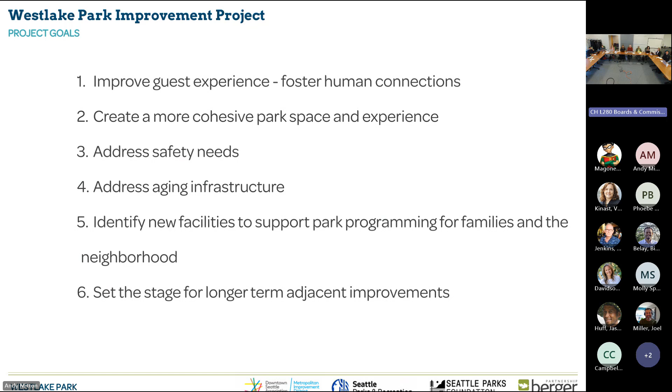So it's been a focus of ours to make sure that what we're doing is compatible with those future developments. Knowing that those are long-term, as Andrew was mentioning, this is really setting the stage to address some things that are failing, and there is an immediate need to get something done, especially with electrical.

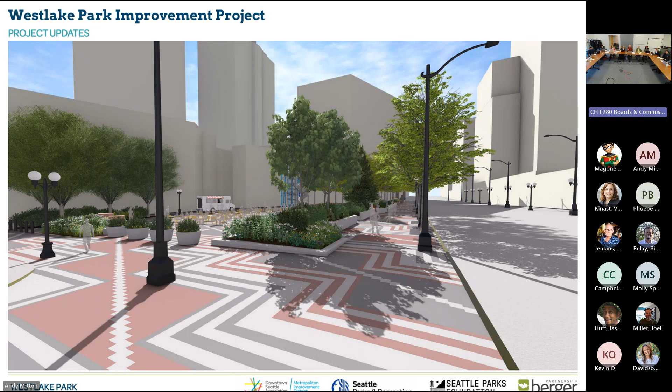One of the opportunities for some of the salvaged carved granite is along this wall, where we're getting a bit of a berm for the landscaping. You can also see along 4th Avenue there's a nice definition of edge, and it's very porous too, which will really help with making it feel comfortable and inviting in the park, and actually ends up being a unifying element through the site.

This is a view looking south into the park. You can see the granite elements here in this planting. One of the things the planting here does is provide a nice demarcation for where the alley is that we need to keep open, the alley egress.

We've provided a larger planting area here under the Zelkovas to help with their success and longevity, and it actually helps frame the park a bit more, giving it more of a park-like setting. You can see off in the distance an opportunity for an evergreen tree, which could be used as a holiday tree.

This is from near the playground, which is more or less where the temporary playground is located today—about the same size as what's there, slightly larger, allowing a little more flexibility and use for play elements. We feel it is right sized for the park.

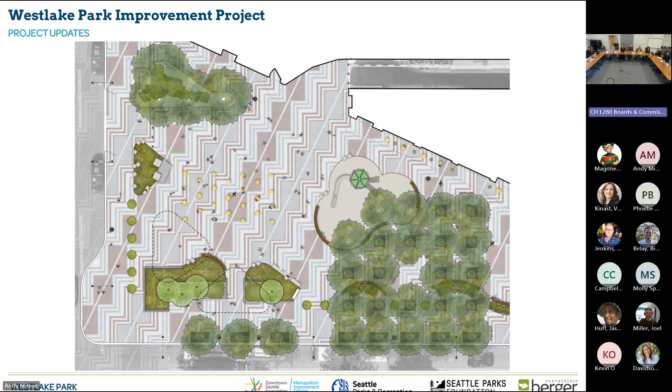I have a quick question. Is there an opportunity to ask project teams questions, just briefly as part of it? Yeah, just briefly. Great, I'll hold it for when it's based on that. What we've been trying to do when we finish deliberation is circle back with the project team - did we raise an unanswered question, did you have any questions about what happened or anything like that?

So I do actually have one quick question. Could you just, with your cursor, outline where the current stage is? Because now we see... It's roughly right in here. Kind of hard to see. And those dashed triangles were the old - those are the proposed new park shelters that are very conceptual still and are not ready for, and are not funded. Yeah, correct, okay, I understand that.

Is the play area in phase one? It all depends on our cost estimates from our general contractor and whether or not we can afford to do that. Is that the first thing that's sort of on the edge? Priority-wise, the priorities are to address the infrastructure and lighting and paving restoration. And we will need to look at what the priorities are. I think the play area is one, but the landscaping and site furnishings are up there as well. So really budget dependent.

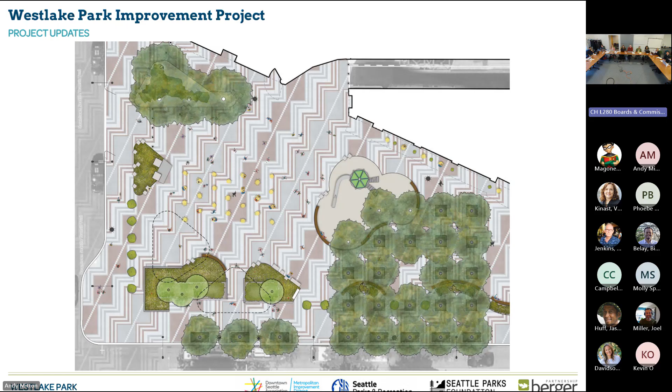And the planter, so that's a planter behind it? It's a flush in-ground planting area. Okay, so the person as they're standing would be visible 360? Yeah, you can see it, except for here, these bushes—these are the salvaged pieces. We don't have a view that really shows it well, but you can sort of see it in the background.

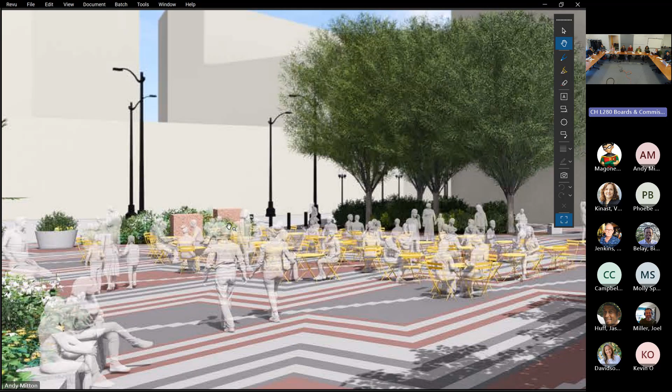What about a person sitting in a wheelchair, would they be visible 360 from the other side of the plantings? Maybe not, it depends on what the plantings are. I'd ask how important that might be, because that's not really how it's functioning now, because the existing stage has been altered—you can't sit or climb up on the other side because a wall was put in and plantings added to prevent people from interacting on that side. So it currently is a one-sided stage that faces the park. I see, because it used to face towards Pike.

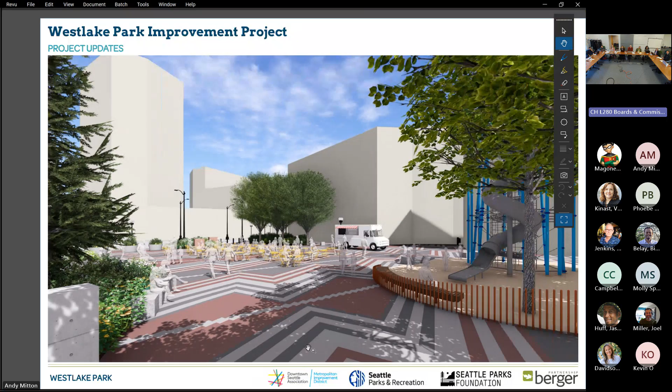I have one other question about the stage. Did you look into keeping the current location but modifying it? Was there exploration of current elements of the park and repurposing them?

We have explored that—let me get back to the site plan. One of the things we did in shifting it is, right now when DSA sets a stage up, they have to set up a temporary stage because the current one isn't large enough to accommodate most of what they do. It's also hard to get performers up there, especially if disabled, and it takes up space usable for tables, chairs, and seating. By offsetting it, it allows them to set up a stage either here or down here, getting more people into the open space. That's why we offset it, to allow more flexibility and use in the area.

Also off of the footprint of the tunnel. In terms of responsiveness to Sound Transit, they don't want us putting elements on the tunnel. There's some right now that we're going to have to move off. But that's the other piece, we're trying to keep those elements within the park footprint.

Sorry, Beth, do you need to move things from this plan to accommodate that, or has this already moved things? The current stage is over the tunnel. Correct. So you're being very careful to dismantle that and not put anything large above it. But it's Sound Transit saying we can't have that above the tunnel. So if it were to remain, that's fine because it's existing. We haven't had that conversation yet.

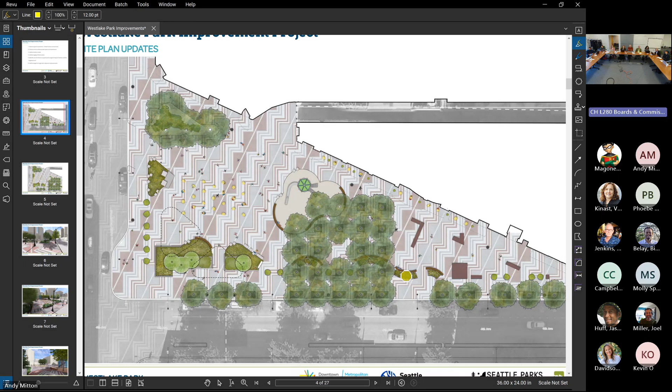There are raised planters that sit on the paving that serpentine and weave through the site, including benches on the backside that are permanent. You can see them through there. So those are above ground, about 30 inches high, and they're also performing double duty, which is we've been required to provide a defensible edge that is crash protected and rated. So that's the other reason why they are there.

There will likely be some feedback that the Parks Department internal design team gave about providing a bit more buffer along that 4th Avenue edge, because a lot of the time the traffic there feels very fast—there are buses and cars moving quickly. So that has a kind of benefit of giving the park more enclosure as an urban space.

On the north side of the park along Pine, has there been any further coordination with the Pike Pine Streetscape and Bicycle Improvements Project on that edge? Has there been any thinking about the behavior of the pavers there, or about the planters on that side? We'll be meeting with SDOT coming up to talk more through that, and it will need to be coordinated further as we learn whether the planters they're developing are crash rated or not. I don't think they are, so I think we're still going to be required to do what we need to do along the park edge. I think there will end up being a double row of planters along here, and we'll coordinate with SDOT as needed.

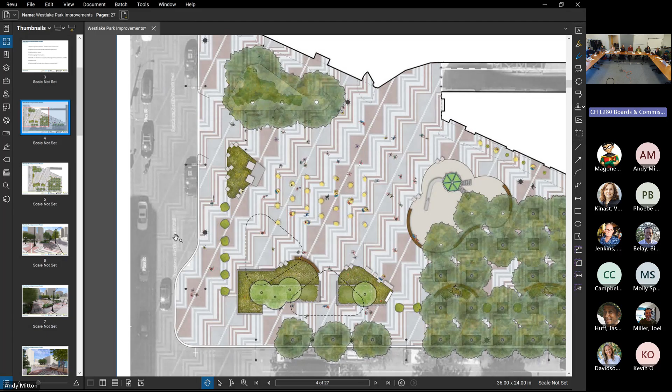I have a question about the playground area—do you know how much it's being utilized right now? Is it popular or not? I know you've done engagement with the community. Anecdotally, from being on site, it tends to get a lot more use in the summer. Not surprising—weather's nicer, there are more tourists in town, lots of families visiting. I have seen it get used in the winter too. I think part of the reason it doesn't get used much is because there's not a lot there, and usually what we've heard is kids will play on it for about 5 minutes, get bored, and move on.

I think I mentioned this before, but the downtown activation plan, which surveyed 700 or 800 people, called for a lot of desire for free, fun family activity downtown. Part of our responsiveness is from that survey. We also did our own survey and had interest in a play area. I know DSA does quarterly surveys in terms of people using it, so that supports the idea for it expanding, but again, it's much smaller than what we had originally shown.

I want to make sure we have plenty of time for deliberation. I think we do, I think we've got plenty of time. Why don't we go until 9:45 with questions, since there's obviously a lot of additional questions, and then pivot to deliberation and action?

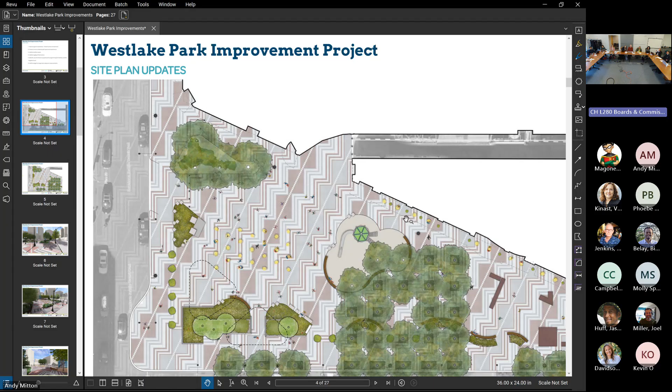Yeah, there's an additional design language added that doesn't feel in keeping. Well, not even in keeping, it just doesn't seem consistent across the park. Are you speaking specifically to the curved? Yeah, landscape seating - in some of those renders, everything's very rectilinear. The trees are laid out in a grid pattern, the streets are 90s, there's very hard lines everywhere. I think what they're trying to do is soften it - I don't want to speak for you guys, but you're trying to soften the lines.

But it seems like sometimes you soften it, sometimes you don't. Sometimes it just doesn't quite say that it's all been thought together to me. Even in this render, the pots just sort of seem like they're blocking the patio, which they are there to do, but they don't seem to be of the same language. I don't know, they just sort of happen to be pots there, and I'm trying to figure out how to make it one thing.

You guys referenced Bryant Park earlier, last time around - that has one language consistent throughout the park, right? I think our current park has one language consistent throughout the park too. Yeah, I kind of struggle with the same question - there's this very basket weave, very predominant pattern, especially when you see it in plan. I'm not sure you really experience it that way in person though. So my initial reaction seeing the plan view is like, why do we have all these curves? But I think it's more about how you experience it in real life.

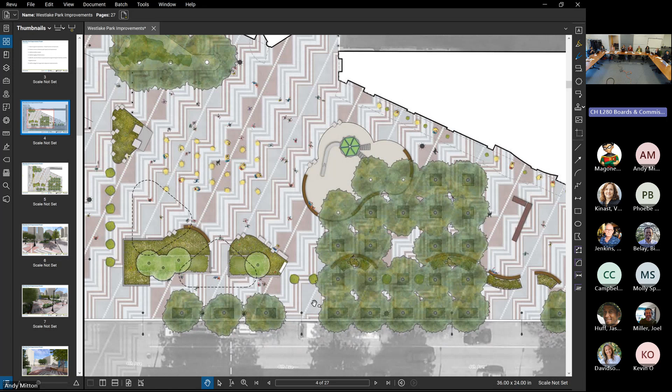I totally agree. And I think the one I'm struggling with most is the northernmost one, because the western two planters engage the pattern and then loosen up on the interior. There seems to be one language happening there that I think spread across all of them could work. I think the serpentine could work—grabbing an edge of the pattern and then loosening up on the interior feels like it could work.

But then the all-curves, all-at-an-angle approach of the northernmost and west feels like the anomaly to me, in that it's just loosely plopped onto the paving instead of engaging it and then intentionally loosening. If you were to keep the arch and have this more rectilinear component, I'd be curious—is there vegetation that could engage that rectilinear component to do what's being achieved here?

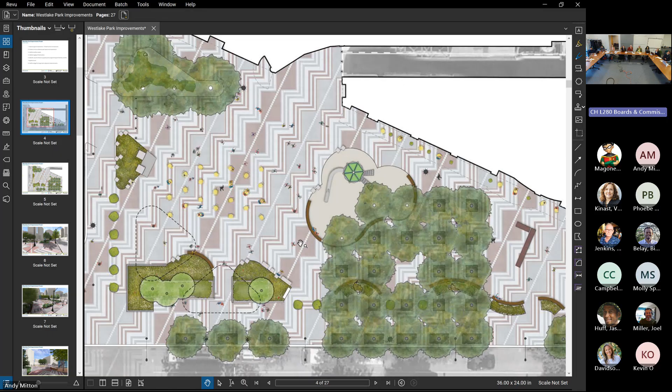To your point, the plantings become the softening curvilinear component. With the loss of that volume—the rectilinear volume of that archway—to me it's like all the energy just drains out of this space. It loses a lot of its physical presence in what is a downtown space with malls and these large rectilinear forms, which we acknowledge has an 80% vacancy rate right now. But I really think you're losing a huge component of the identity of this space if you get rid of that arch volume.

Particularly with this perspective—could it become a threshold into this location compared to a barrier, as you're describing it right now? Picking up again on the geometries, the Coast Salish pattern is the field, and nothing in the existing park actually aligns to it. It's all object placement, and the art is the very explicit form of that. The bosque trees hold that center, and I think the additive piece and the arch actually are that as well—it's an object in the field, it's a folly. Westlake Park is designed as a series of follies.

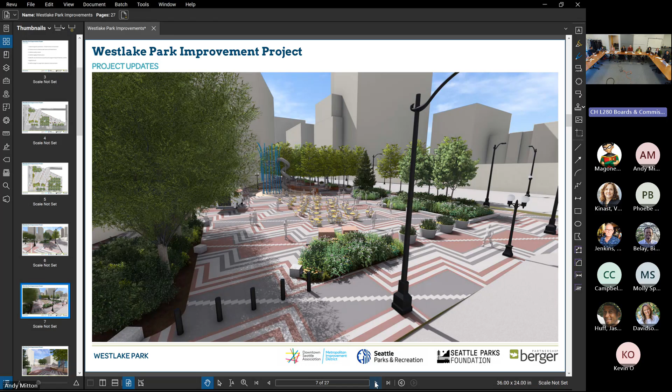It's kind of high level. Darklight is looking at, in the north—I'll go back to the plan. In this north area, there would be a series of 6 poles flanking either side of this, where we'd be able to get lights that directionally cast down on the pavement.

Jill Cody is on the design team from Darklight. She's not looking to uniformly light the space like a prison yard. We are looking to meet the standards for light levels, but we want to do it in a way that makes the space feel comfortable and welcoming.

I should preface this a little bit—we have adequate lighting along Pine Street and 4th. It's almost overlit right now because of the spacing. So a lot of what we're trying to do is brighten the other areas to level out the lighting to a certain standard that Jill would have to go into more.

The tree grove, probably the Zelkovas up here to the northeast, is the toughest space to try to get lighting in because we've been asked not to attach anything to the trees. That's been a huge problem to date because everything is temporary and zip tied. So what they're looking at is a series of offset poles that somehow brings catenary light elements through the trees to give a soft glow and a warm, inviting feel to the grove.

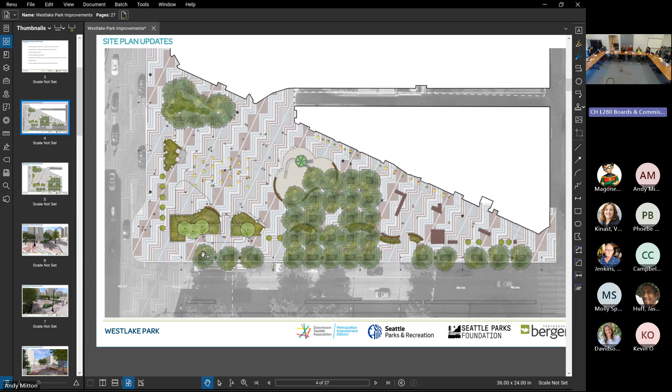I think I get that, and it absolutely makes sense. But it does bring up the question—if this is a parks improvement plan with a tight deadline, are we retaining the public input that could not be completed within that timeline as any future visioning for Westlake occurs? So as anything happens on the south end of the site, how are we retaining the broader public input as we take care of the things that are fundable at this moment in time?

Isn't that why the perimeter and setting up continuity around the edges of the park, plus rewiring for electrical things, is more important, and the things in the middle are less important? It seems like we're going to define the boundaries now—we're going to build the boundaries now, put in upgraded electrical, and get rid of the old fountain.

And then we're going to focus on what's in the park once the community and the funds and all of that. That's sort of how I'm hearing this. I guess my question is, is there intention to do that? Are we focusing on this park improvements project now, and then are we retaining this as a long-term vision after?

Yeah, but we already know it's not funded for at least 6 years and it's got to live as this thing. So the tension is then what are the decisions being made right now that have long-term knock-on effects for the community's sense of identity and relationship to this place? Are those decisions being made right now to meet this construction deadline?

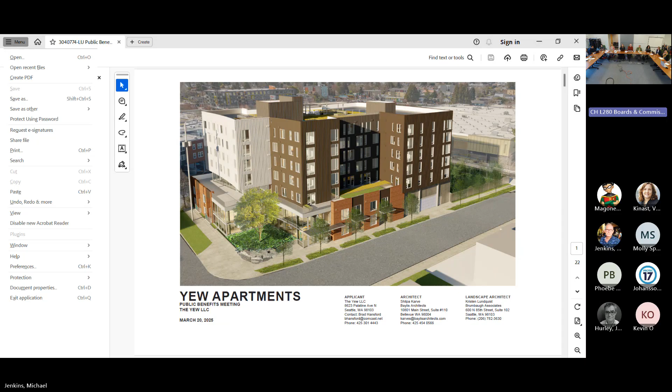Yes, I do, thank you for doing that. Sure, so let's start the presentation. As Michael mentioned, we are here to present the public benefits towards the alley vacation petition that was filed in November 2023. We had a meeting with the subcommittee last year, almost exactly a year ago in March. We are here on behalf of our client, the Yew LLC, representing Baylis Architects, Brumbaugh, and Molly from Van Ness Feldman.

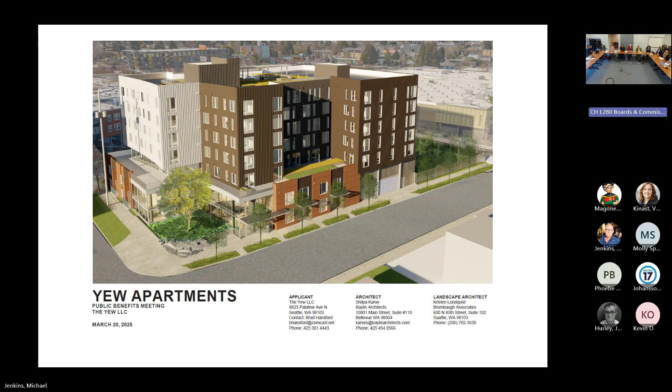The couple slides that we'll go through next are essentially just a quick run through of where we are currently. Next slide, please.

This is the project site, looking at it from the northeast corner, bird's eye view. What we see is 87th Street, which is the urban edge of Greenwood Village, urban village. On the west of the site is a conservation parcel that's about 11,000 square feet. There's another unique feature to the site, which is the yew tree, and the design of the building is pivotal to that tree. There's also an alley that's a remnant, it's dead-ended, with no functional use, no vehicular or pedestrian use currently, nor any utilities. Next slide, please.

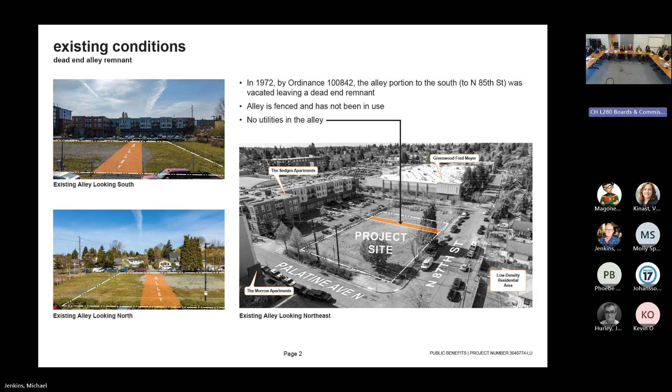As part of the application, we had two community engagement meetings. One was two years ago, mostly to introduce the development. The other, more recently in January this year, was to go over the design changes that resulted from the EDG, MUP, and SDC subcommittee review comments, as well as changes to the owner pro forma. We also took information from our previous community outreach meeting and folded that into the design. So the latest meeting was to introduce to the community what the changes were. Moving on to the next one.

Looking at the current state of affairs, that's how the building massing looks from the same vantage point, the northeast corner. The building density changed, and we've added more residential uses to the streets. Palatine already had a townhome connection; we've added a similar connection on 87th, which will unfold later. The purpose of the vacation is to fully utilize the design potential of the site and in turn be able to provide public benefits that are actually beneficial to the neighborhood.

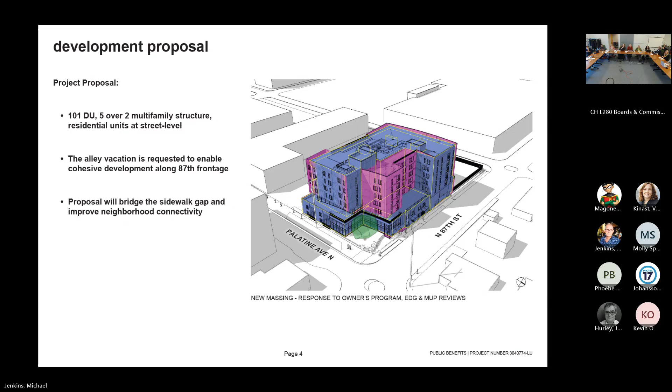This is a quick overview of the changes to the design at the ground level. This slide is important to us because this is an interface that, although within the project site, faces the public realm. Here we explain that we've made changes to the design such that most of the facades facing the pedestrian level are all residential.

Based on the last subcommittee review comments, the design team went back and zoomed out, looking at the larger scope of the site, and noticed there are two large public amenities: Sandel Park to the north and Greenwood Park to the east. We realized the pedestrian connection there is good linkage, except for this portion missing on the site next to 87th. We felt that was an important connection to complete the sidewalk and pedestrian linkage.

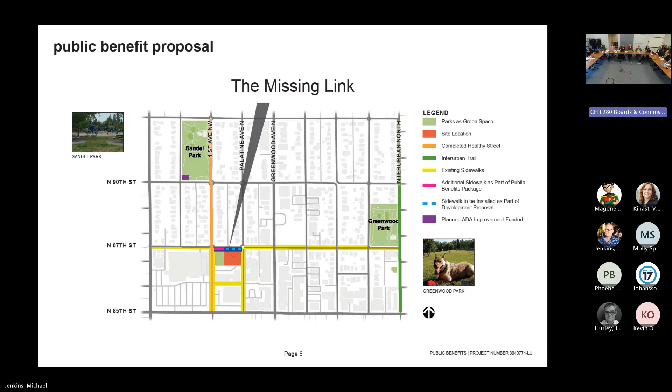Let's dive into each of these public benefits. What does the new extended sidewalk connection mean? On Palatine Avenue, we're providing 2 additional feet of sidewalk extension to promote walkability and more use of that space. As you turn the corner onto 87th, we're extending the sidewalk from the project site boundary all the way to 1st Avenue, including 6 feet of sidewalk and 6 feet of planter strip built to City of Seattle code. On 1st Avenue, we're widening the existing 6-foot sidewalk by 2 feet and proposing pervious pavers since that site is a stormwater drain, which works better given the current use there.

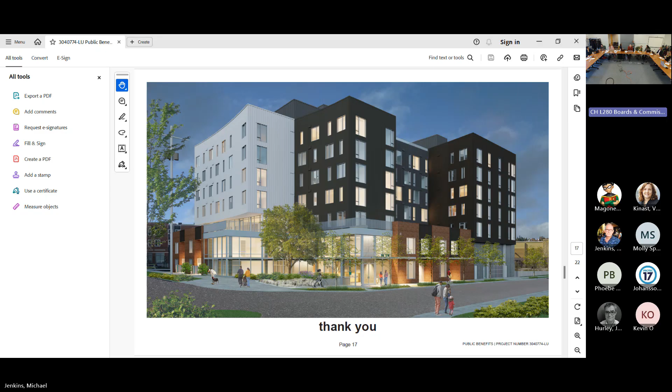Okay, well, thank you everyone. It's nice to be back here and it's nice to be back with this project too. I didn't realize it had been so long. Almost two years now.

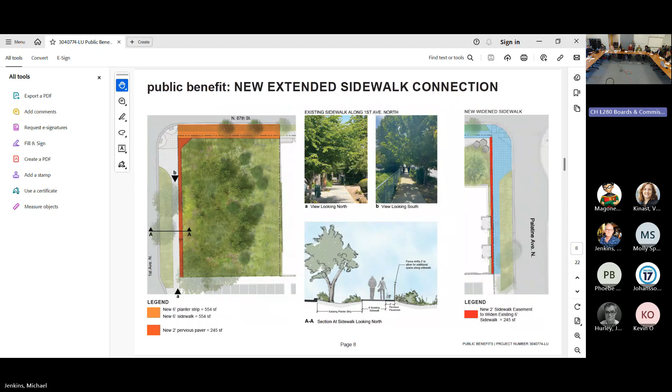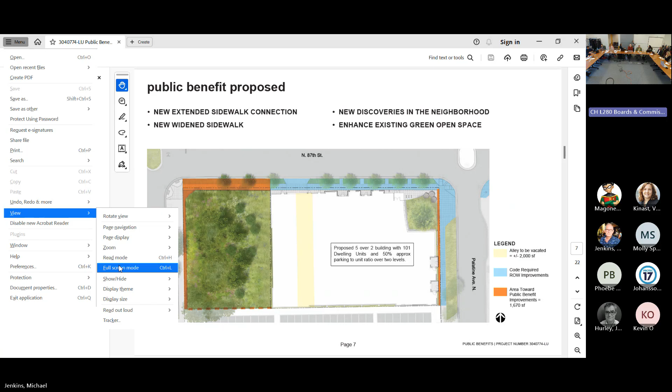Overall, I think the project has evolved in very positive ways. As you know, the developer stepped back and looked at the number of units and the makeup of units, which stepped us back. Kelsey's worked on the SIP from the very beginning, so she'll talk about some of the street edge stuff. But it feels very positive. I live one neighborhood over, so I'm very familiar with the area, and the project just fits right in. Greenwood is becoming really hip, and this will be a great addition.

As the project evolved within SDOT, we wanted to be clear on what our obligations are from design review, code, or standard practices, versus what would really rise to the level of being beyond code and a public benefit. So we wanted to make sure on that. I have some questions about the one gravel strip, and Kelsey's going to talk about the materials.

But I think we're at a pretty good spot in understanding the obligations of the project and what would be public benefit. The evolution of the use of the conservation site and the amenities associated with it, they just look cool. I can see people walking by to Fred Meyer or Taproot Theater, being really charmed and engaged by the art around the site and the enhancements. Those look impactful, maybe beyond what they are - as a package it's arresting when you walk by. I really like that. The streetscape looks good as well.

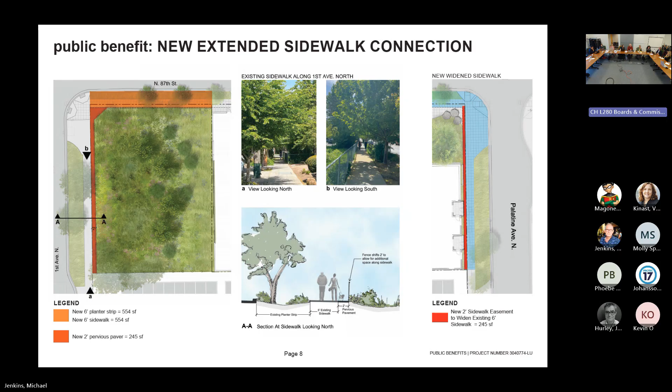At that, we will turn it over to Phoebe for questions round and then conversation. Do you want me to put up a particular slide? I can start here, and if you guys need - I'm driving the presentation. Right, I think that's fine. I thought we would just go around the room for the questions and then put forward the set of deliberation, which are pretty straightforward, I think, shortly. So we could start with Kate and just go around as needed.

Thanks for this presentation, it's really great to see its development - just to echo everybody else's comments. Very excited by the direction the conservation parcel has gone, because I remember when the project was first being presented, it wasn't being touched at all. So it's a huge development. I was curious to learn a bit more, if you have any sense of how the decorative panels will be designed, or where it's at right now.

We're just starting on the design of that, looking at laser cut, painted material that can be attached to a fence or integrated as part of that, so that it's easily cleaned and can be maintained nicely. So the imagery shows one option, but we're also looking at other materials.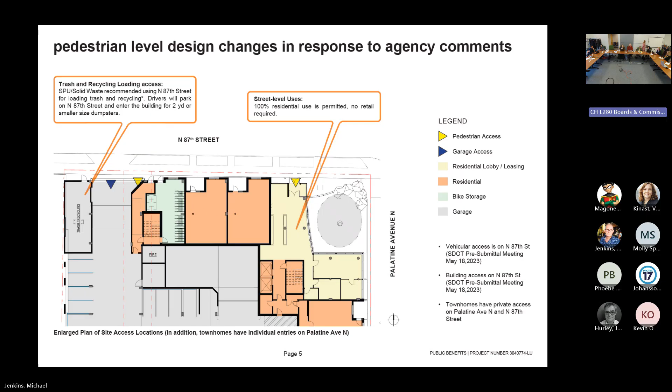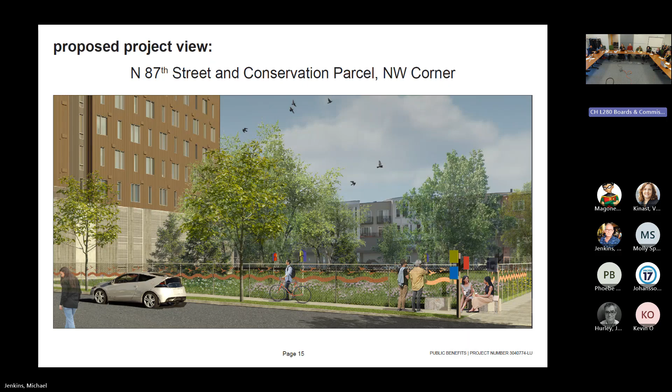And I'm assuming that's all worked out. Another question was about the aesthetic of the wall that faces the vacant land, since that will be a finish facing the neighborhood. Could you go to that render? Sorry, I think this was stuck on the first side, I was really stuck on the solid waste slide. Yeah, there's a rendered view, it's towards the end. Oh right, there you go. Okay thank you, go one backward.

To answer your question, what we have is board form concrete that alternates with regular concrete, and board form concrete in vertical panels, to mimic or draw from the concept we have going for the upper masses. The base has openings that alternate and will have metal mesh, which is to bring in natural light and ventilation into the parking.

There was a significant change in this facade between when you saw it last and today through the design review process, which really changed this whole facade. If you remember, it was somewhat flat and didn't necessarily have the same unit counts. Now the units are much more visible than in the previous iteration. The design concept is based on growth rings of a tree trunk, since the yew tree was pivotal to the design. Each tier is a ring in elevation, hence the curve at the west wall where the mass is reduced. We've reflected that in our colors and materiality, with vertical siding throughout.

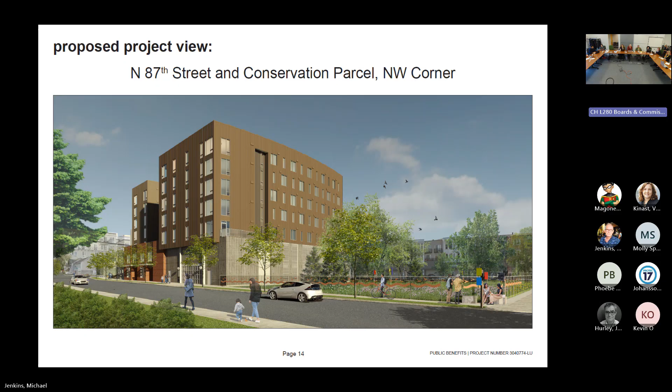I remember in the last presentation there was a lot of focus on the other corner. Is the seating plan you mentioned on the other site still there? It's by that tree at the corner, we have some boulders there. That area is still proposed, it's just not part of the public benefit, but it utilizes stone. The yew tree will have native plantings underneath, sloping down, using stone to create a more organic condition with seating, and those elements are repeated at the corner of 87th and First, in a smaller way.

My only question was whether the space where the yew tree is located is accessible to the public, because in a previous iteration it seemed fenced off. The sidewalk is pulled back there so there's more circulation space, but a sizable area is not physically accessible because we want to maintain the yew tree itself. It will be landscaped. That was my only question.

I have no questions, thank you.

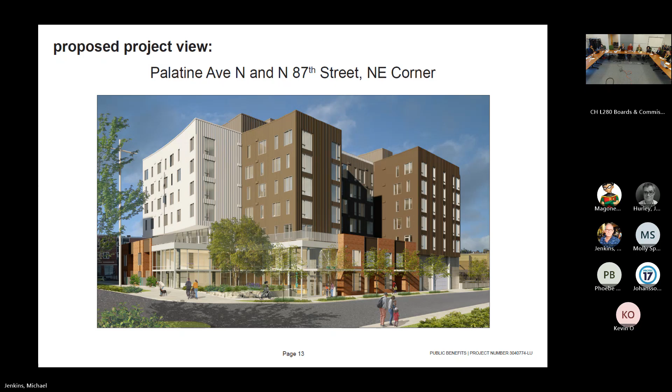I'm curious about the adjacent traffic circle, if you can share what you studied, what worked and what didn't work, related to the adjacent traffic circle right here.

So when we looked at this, in earlier proposals we tried to engage that corner, and we were trying to look broader. We pulled back in and looked at the site as a whole. At that point we took on conservation corner. When we revisited going back to the traffic circle, it became too much of a fight, so we didn't look at other options for that in conjunction with what we're proposing here.

On Plan West, that area is pervious paver gravel. The portion on Plan East is an extension of the sidewalk. Just want to clarify that.

A little more on the question about the fence - are you engaging artists for the work on the fence, or is the project team completing the fence design? The project team.

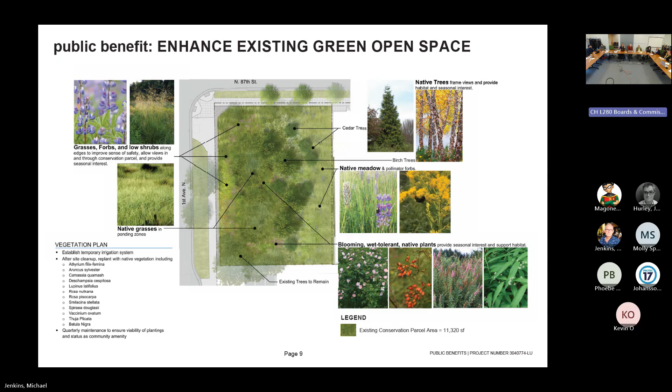Make sure they don't reintroduce - we captured that on the last slide. So the owner has allotted dedicated additional funds for additional maintenance over time. On which slide? 27 - these are additional slides we had. Oh, here, this? Yeah, we gave an outline, a summary. And that's like a 20-year time frame, perpetuity? TBD - it's going to have to be multiple years for sure, because those natives have to establish.

Are you guys doing anything with the building runoff feeding the park, or any sort of combination of the two? Given that it's a peat site, everything's just getting routed straight down to perf pipes below the building to rehydrate the peat.

That's a question that's not strictly our purview, but it relates to some of the policy objectives in all this. What is the parking provided in the building per unit? It's about 50%.

I mention it because with these projects and the increased density in the city, wider sidewalks seem like something that is not always there. So this is more a comment and question, but I think it's significant to add 2 feet.

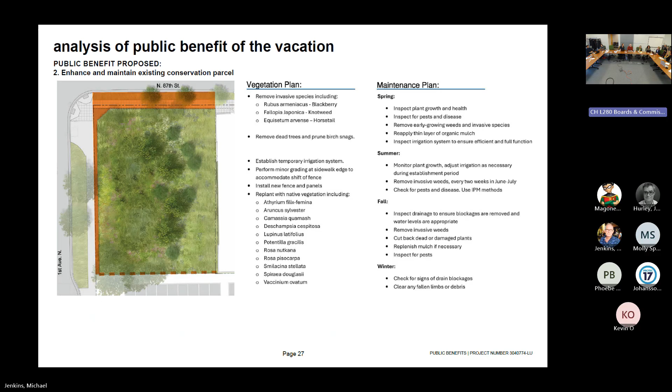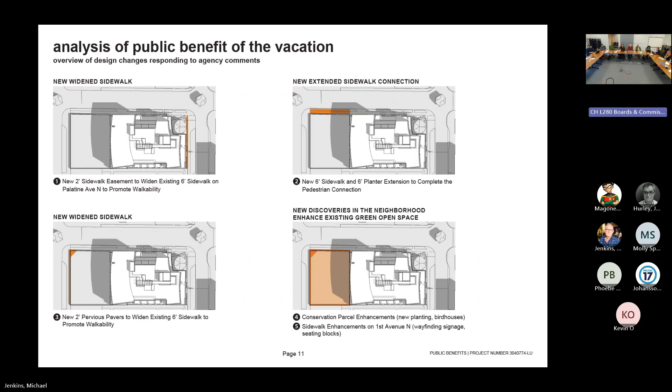Okay, are we ready to discuss? I just have 4 overall buckets, let's talk about them as a group. Don't need to go around the room, just clarifying that again. So the first one is overall improvements to meet public benefit, just commentary on that.

To reiterate, Michael's nicely put them on the screen: the extension of the sidewalk, widened sidewalk on First and Palatine, new discoveries in the neighborhood, and enhanced existing green space. So just overall commentary on that, and whether that meets public benefit.

Number 2, the overall design and building response to previous comments, or any additional values you want to put in there, especially how the building is relating to those public benefits proposed. Number 3, overall response to public engagement, and how that's manifesting in the design.

And number 4 is kind of a subset of the public benefit, looking at the overall plan for art, signage, birdhouse, fencing that Kate brought up a bit, just that overall piece of the package, because that's kind of additional past the scope of the project. Anything else? So 4 tiers.

No? Okay, let's go. So first, public benefit. How do we all see the proposed public benefit? Any additional comments, concerns? Phoebe, I'll weigh in.

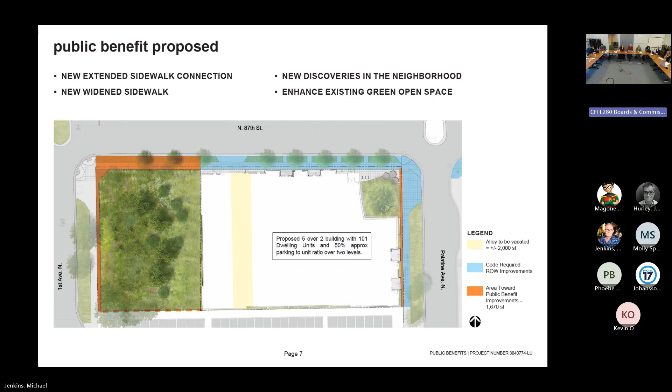Overall, the commission appreciates the sidewalk extensions. They feel appropriate and feel like a significant benefit to the community. It was also pointed out that First Avenue is a stay healthy street, and so those kinds of improvements along that corridor are significant and really will be noticed, so that the broader reach and understanding of the community does read through here.

We appreciate the approach to the planting at the conservation easement. It has a sensitive approach to native and adapted species, and also for ecosystem health, but also community and pedestrian health. So that balancing of what it is to be kind of a natural parcel, but in an urban environment, is important.

We also appreciate the responsiveness of the facade and ground plane approaches. As it's been said nicely, this does feel like a replacement of adding building where there was an alley, keeping that light and air and the sentiment of light and air. This is a reasonable replacement, and the relationship of the ground floor to the conservation easement is well received.

We do feel education is a really valuable addition to the community, as cited in the signage, the birdhouses, and the art. So we do feel that will be valued and does need to feel intentional. I'll get to the next part later.